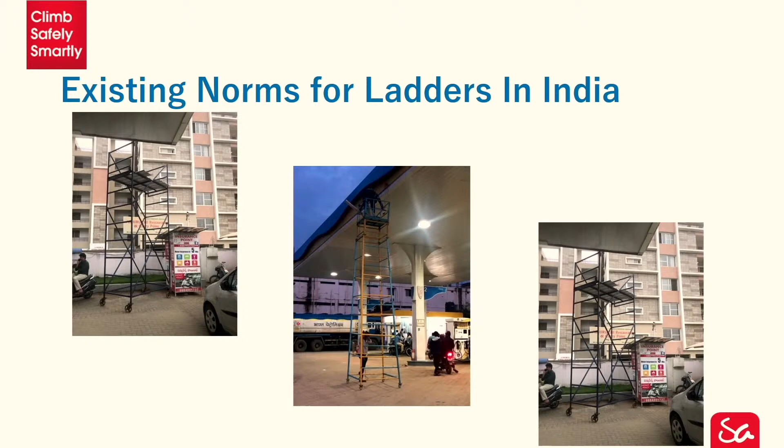Why do the standards suffer? Okay, this one, right? The standards suffer because we don't have a reporting system. We don't have a system that tells us how many people have had accidents just because of not following safety standards, be it home, be it outside. So these are the currently existing norms that people use. They are not safe, they are not standard, they are not good quality products. They are substandard products existing in the market.

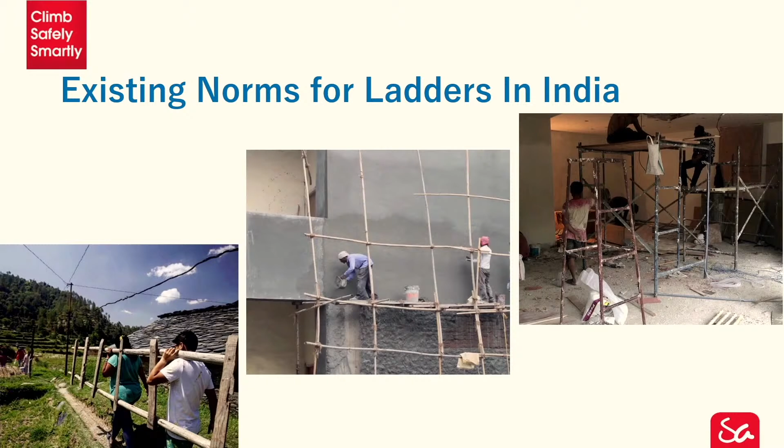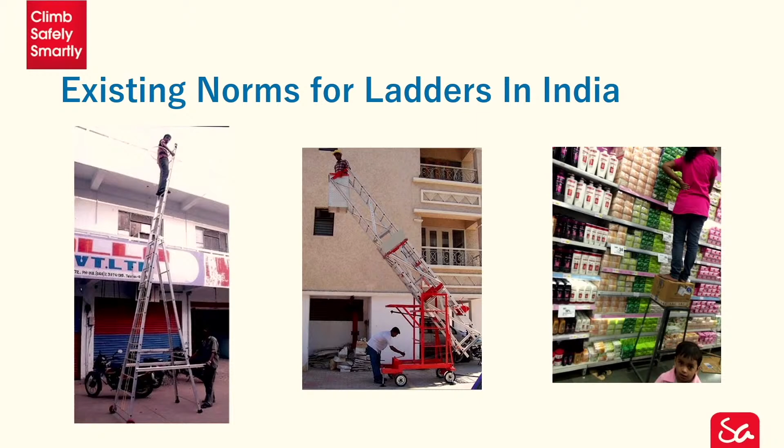It's for us to realize what is important, what is safe, and we actually let this happen. Even today, it's 2022, and we are still using bamboo ladders. With unsafe products, safety is totally compromised everywhere. Now the concern is, what are the safety measures that we can take? What is it that is plaguing our society?

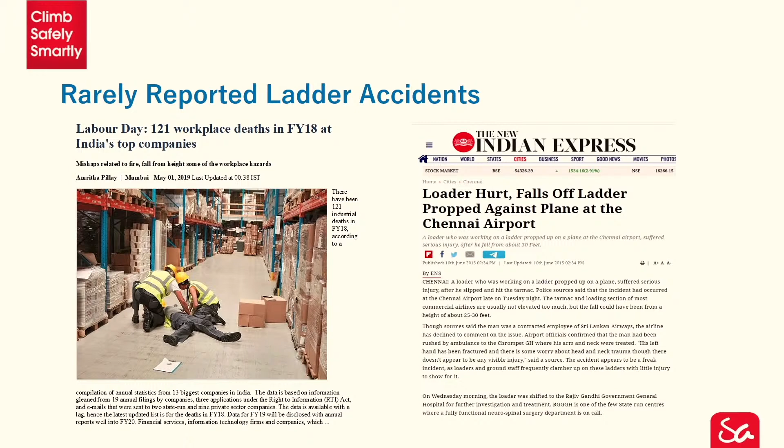We have numerous accidents happening at workplaces which go unreported. Many of them don't come into any reports, or even a police complaint is not filed. Many accidents at home are lost because they think it's not an accident. Some of these accidents are of course fatal. Some of them lead to permanent impairment. And unfortunately, even if these people go and fight for their rights, their life is gone in courts, not at home.

Now, this is very, very important as a country, as people, that we all take care of these issues and ensure safety for our people. They are our people, right?

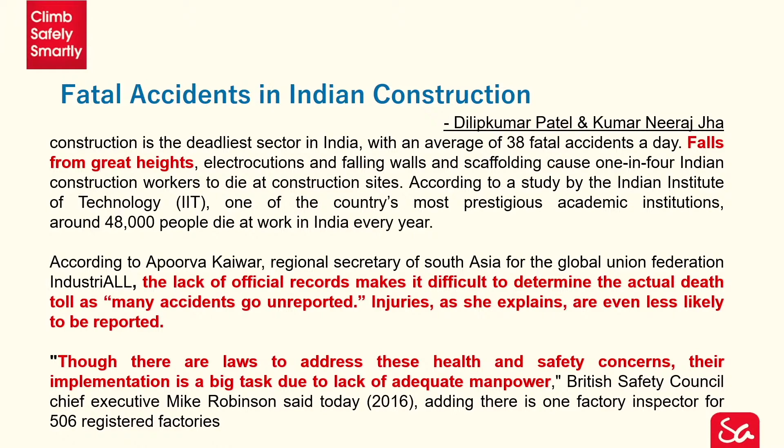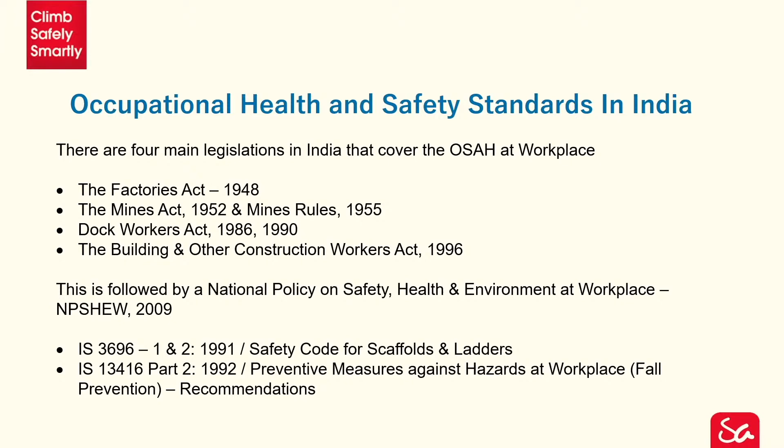Now, what we intend to do is, first of all, we know all these acts, which are very, very old. They need to be updated, for which we, Sagar Asia as a company, are working with Bharatiya Mazdoor Sangh and the Labor Ministry to come up with laws that can be implemented into industrial safety. Please don't hate me for that. So these laws need to be changed.

But the positive side is that the MNCs today take it as an important factor. They look into safety measures, and they actually want to buy standardized products. So now let me introduce you to Sagar Asia, a company that is about 40 years old with 150-year man experience because of the brands, the quality that we associate with.

This is what we bring, from the height of 2 feet, that is domestic ladders, to 400 feet industrial ladders. And when I talk about ladders, it's not just ladders. They are access equipments, right from scaffoldings, wind tower internals, to aviation docks.

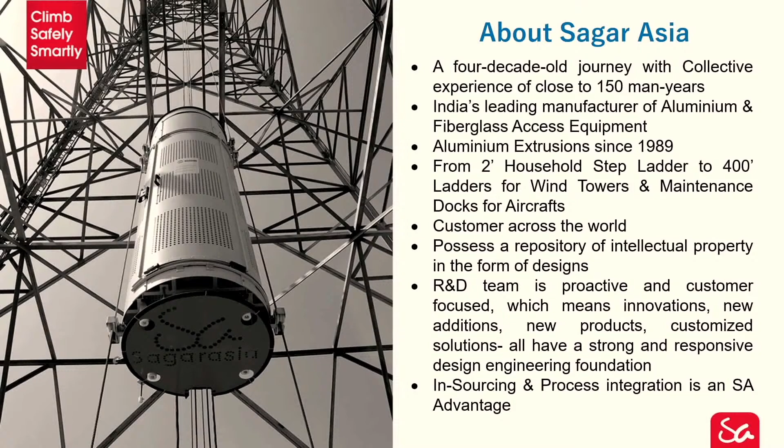Our research and development team works constantly towards providing the best safety products. We follow all the standards of safety, right from American, ANSI, EN, and Australian. So as a company, we have the capability in terms of technology to provide products that follow or conform to the safety norms around the world.

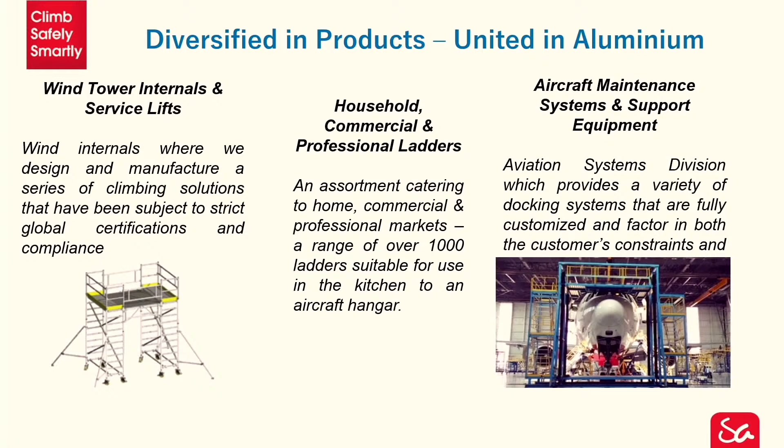So I'll take you very quickly through the range of products that we have, the wind tower internals and lifts. For that, we have household, commercial, and professional ladders, equipments for the aviation docks for MRO, extrusions, aluminum scaffolds to reach as much height as you want, we have manufacturing.

Moving on, the reason why I came here is to showcase a business opportunity which can be implemented for first generation entrepreneurs. Our MD, Mr. Vidyasagar, is a first generation entrepreneur, and he knows the problems that we face while setting up an MSME. And what he intends to do is support more young entrepreneurs into MSME businesses which can create employment in India, and of course be able to be part of a systemized culture that can help them run a sustainable business.

So we have our ladders, called Eurostar, a DIY ladder, for which we are giving the technology at such low cost that a person can start a business at just 24 lakhs. As a company, we make an investment of 76 lakhs in terms of technology and machinery. We handhold you to the business. We have the capacity to buy back the products. We help you promote the products, and we help you run a sustainable business. All the operations of the business remain in your hand. Our intention is to make you more and more independent.

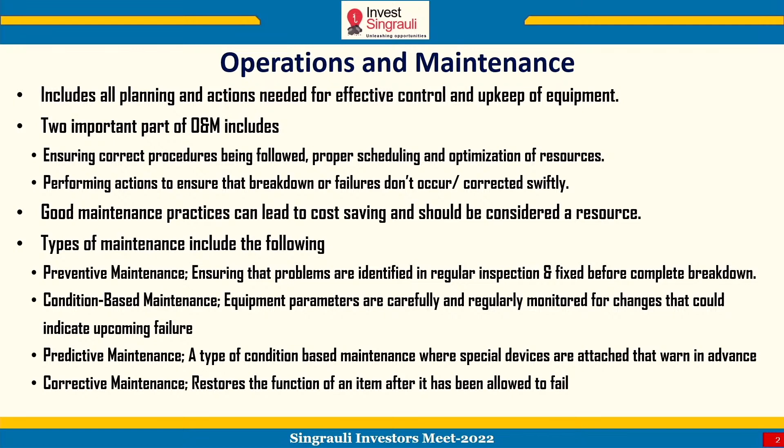So, talking specifically about repair and maintenance in mining and power sectors, because we are talking at a forum where people from the nearby region have come, and we are looking for opportunities in this area. So, this area is basically occupied by industries involved in the mining sector, mining के काफ़ी equipments हैं, plus power sectors के equipments हैं. So, in both these sectors, whether it is mining or power, the equipments are subjected to excessive continuous working, generally 24/7 without stoppage.

The loads that are applied on those machines are harsh: they are impact loads, sudden loads, excessive loads, thermal shocks, stress corrosion cracking. Many of these components, if they fail or require any predictive or corrective maintenance, have to be handled on site. At most they can be brought to a base workshop or a main workshop, but generally it is not possible to ship that equipment back to the original equipment manufacturer to get it repaired and brought back.

So, the harsh environment often leads to frequent breakdowns and failures. These breakdowns are very expensive; repair of these components is also expensive. At the same time, the failures disturb the regular working of that equipment, and these shutdowns are often very expensive. Therefore, there is an urgent need for repair that sometimes has to be performed on site or in the proximity of the site where the failures have occurred, to ensure that the equipment and components are available 24/7.

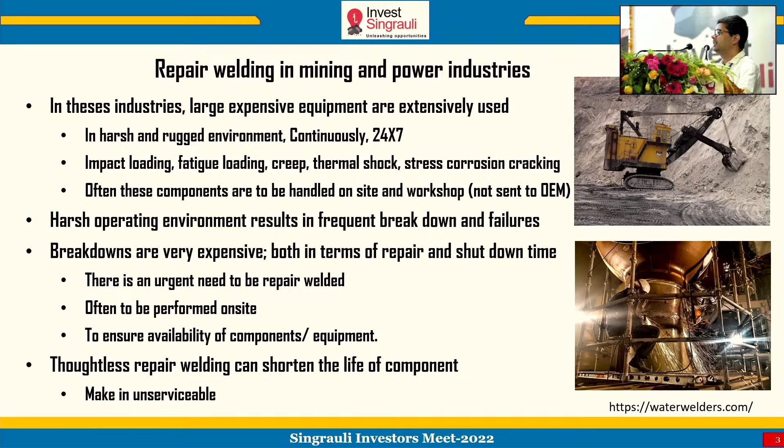It is important to note that any thoughtless repair, if attempted, will not only fail to rectify the problem, but can sometimes make a component that was repairable unserviceable. So, this is currently the issue, and this problem offers a lot of opportunities.

Next. Welding maintenance can be preventive or corrective. To prevent failures, for the equipment we have purchased, activities like cladding and hard facing can be done on those components so that their life can be increased. This is a tremendous opportunity, because components like mining equipment are continuously used in environments where they get worn out and corroded, and if they are cladded beforehand with a layer of harder, more wear resistant or more corrosion resistant material, the component life can be increased. These processes also come under the category of welding.

Some of them require expensive equipment, but many of those processes can be done using equipment which is pretty cheap and already used for welding applications. Similarly, repair welding is another technique which has to be used often, and it has to be done in a very thoughtful manner so that it can actually help the industries where it is used.

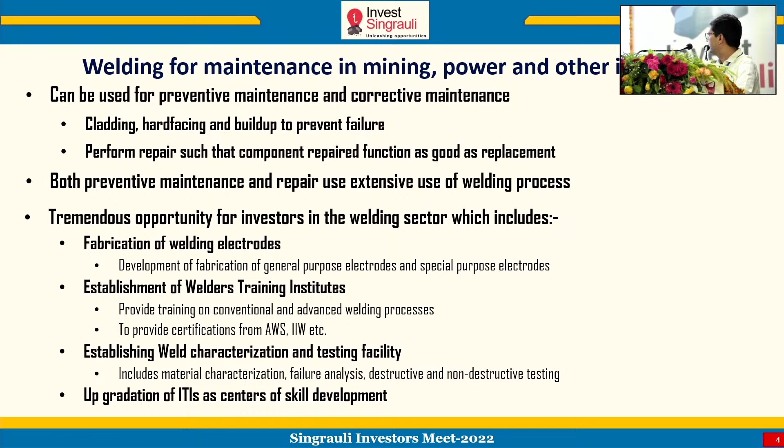Next. Welding electrodes: I have made an extensive survey and visited industries, and they are extensively used for many repair operations in both power and mining industries. These electrodes are consumed in very large quantity because most of the welding work relies on them, and it has been estimated that globally the contribution of welding electrodes as a consumable in welding is 40%. But in the nearby region and industries, this reliance on stick electrodes is still higher, around 60%. So, this offers a tremendous opportunity to establish industries which can manufacture electrodes.

The shielded metal arc welding electrode is a very simple consumable. It has just two parts, as you can see in this figure: a metal rod coated with a layer of flux. Any manufacturing industry just needs to initially procure the rod and coat it with a layer of flux. These two simple components and this simple activity can lead to the establishment of a welding electrode industry.

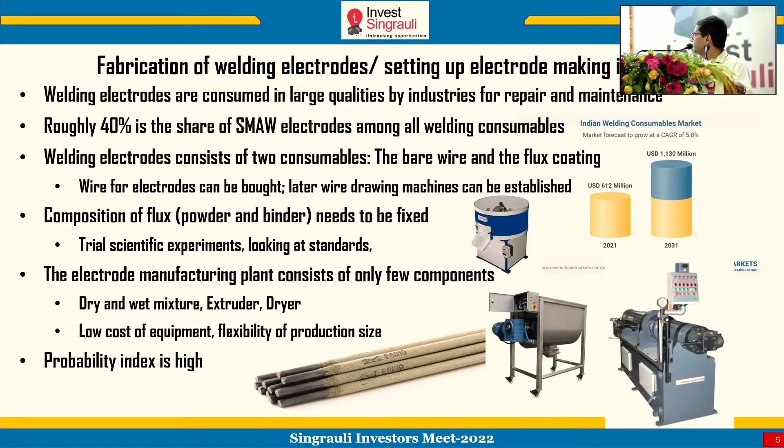Now, I have been associated with welding and I have visited many places across India. For welding jobs, we recruit welders. Often these welders are trained in those particular industries, let's say mining industry or power industries, to perform the job fairly well. But for critical applications, it is often mandated that the welders should be well trained, but more importantly, they should be qualified and tested by agencies which offer certifications to the welders.

A welder who has been certified by these agencies will have a lot of demand. Not only will it improve the quality of the welds that are produced, not only will it improve the quality of the repair, but the employability of the welder will also tremendously increase. So, if you go particularly to the western part of India and southern part of India, there are a lot of institutes which offer help to the welders, and in turn they can also make profits.

So, welding training and certification institutes, which are very small institutes, not as big as an engineering college, just a small institute where there are some minimum facilities. Let's say a training institute for the shielded metal arc welding process has to be established. So, a certain number of welding stations, a certified welding inspector has to be hired, and that institute can be started. The institute will provide training.

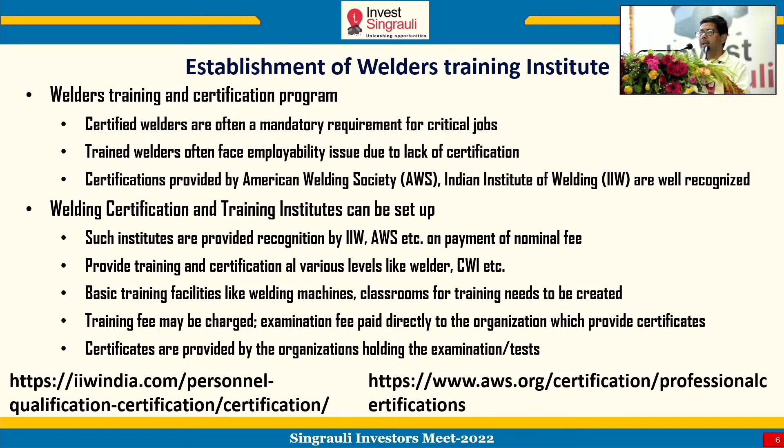The cost that has to be borne can be taken in the form of a fee from those welders, and successfully profitable institutes can be run on this mode. I have given the names, the websites of these organizations like Indian Institute of Welding and American Welding Society. They offer certificates which are well recognized, and they are very much sought after by welders. Next please.

Now when we look at these expensive equipments that are used in mining and power, there are bound to be some failures, and of course corrective actions in the form of repair welding have to be carried out. Now during the repair process, as well as to ascertain why the failures have occurred, a lot of scientific data needs to be collected in the form of testing.

There are private institutions, particularly in larger cities, which have to be approached and which offer these facilities. They have got trained professionals and the equipment needed to test the material, to perform corrosion testing, to investigate why a component has failed, and to offer some special testing.

Now after a component has been repaired, or there is a component that has been fabricated in-house, there are always chances that there may be defects present inside the material. On the top part, the machines will actually destroy the material and then tell you whether it was good or bad. Then there are other sets of techniques available which can, without destroying the component that has been made or repaired, tell you whether it is good or bad. These are known as non-destructive testing facilities.

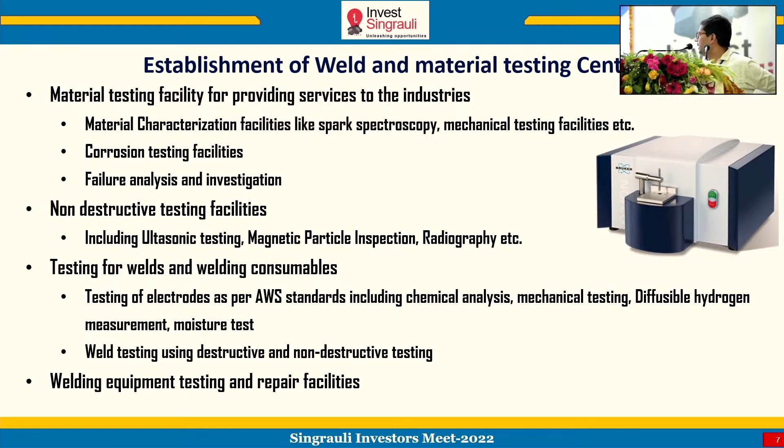Similarly, welding equipments, particularly arc welding equipments, are pretty simple components, and any breakdown in those components can be very easily handled, because the parts that generally get damaged in these welding equipments are inexpensive, and generally when the welding equipment fails, it does not mean that the entire equipment has failed, only some components have failed. So an institute can be established where testing, repair and rectification and standardization of the welding facilities and equipments can be carried out. Next please.

Now another very important area where I would like to talk and where people have to think, particularly the MSMEs who are already having their enterprise in this place, and similarly the other big organizations, is the upgradation of the ITIs and setting up of new ITIs which actually cater the needs of the nearby industries. The curriculum, the facilities that are generally present in ITIs need to be upgraded so that people who are coming out after graduating from those ITIs have the necessary skills that will be required for the industries which are going to hire them.

So this is another opportunity where, with a new curriculum, with a new course structure, ITIs can be established and other existing ITIs need to be upgraded. These facilities that can be augmented in the ITIs can also be used as a tinkering lab or a prototype lab where any new idea, any new development that is coming to the mind of existing manufacturing MSMEs, can be tried out in these upgraded ITIs.

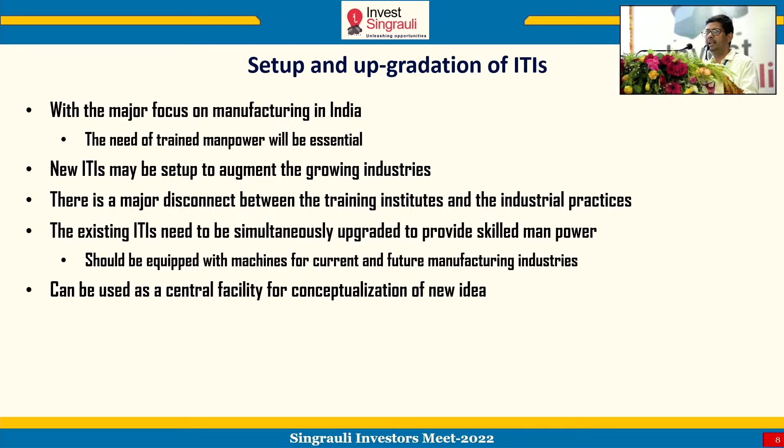So that's all from my side. I have a small 2-3 slides that I would like to quickly go through. Next please.

Okay, so as I have already told you, we belong to Indian Institute of Technology BHU Varanasi. Recently we have signed an MOU with the Central Government Ministry of MSME, New Delhi, wherein we are an implementation agency of a scheme of the central government known as Design Clinic. So we are an implementation agency and I'll tell you how we can help. This scheme basically is for those MSMEs that are involved in the manufacturing sector. This is not for any MSME, only those MSMEs that are involved in the manufacturing sector.

And these MSMEs, if they have got any design related problem or they would like to develop any new product, they can approach us, and together with IIT BHU we can put up a joint proposal that will be sent to the Ministry of MSME, New Delhi. Next please. So as I have mentioned, the idea is that any new product or improvement of the product, if it is needed by a manufacturing MSME and it requires investment, can be handled through this scheme.

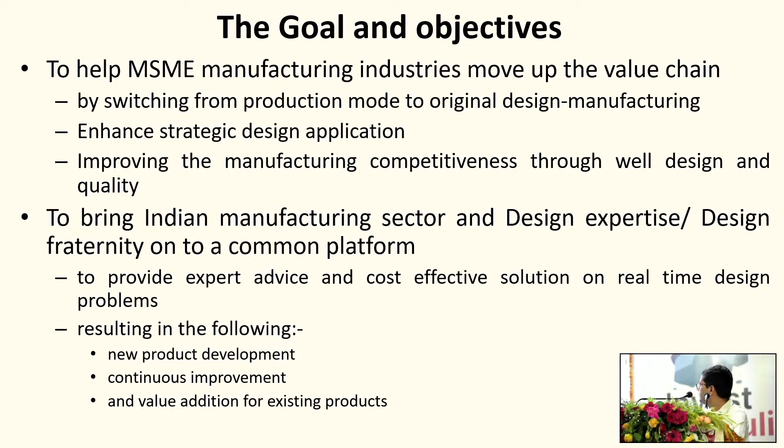So this scheme basically provides assistance to the manufacturing MSMEs in form of support from the Ministry of MSME to the extent of 15 lakhs. So 15 lakh rupees can be provided to the manufacturing MSMEs for any of these projects, provided the industry also shows their commitment by putting up 25% from their side. Together with IIT BHU, we can submit a proposal. Next please. Next. Next.

So Government of India share will be 75%, and the extent of help can go up to 40 lakhs. This will be in terms of expenditure that is borne in coming up with a new product or overcoming the existing problems faced by a manufacturing MSME.

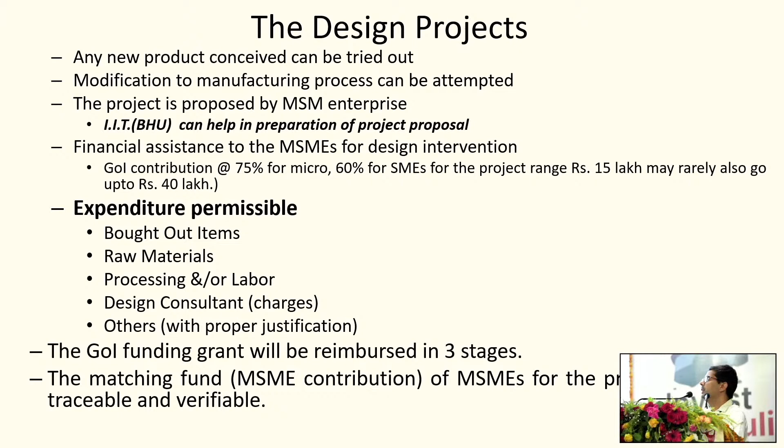The good thing is that the 25% share that the industry has to put can come also in form of labor, raw material, design consultation charge or any other charge that is justified. So many a times any bought out equipment that will be later used in the industry can also be put as a share from the MSME. It should not be necessarily hardcore money. It can be in form of equipment also.

The Government of India funding will come to the institute, and we will be providing you with the money that is required for whatever stages. In different stages we will be providing you the money, and ultimately when the product or the problem is solved, the respective manufacturing MSME will be benefited from this.

There is also a scheme that I would like to share over here. Sometimes the manufacturing MSMEs, next please. Next slide.

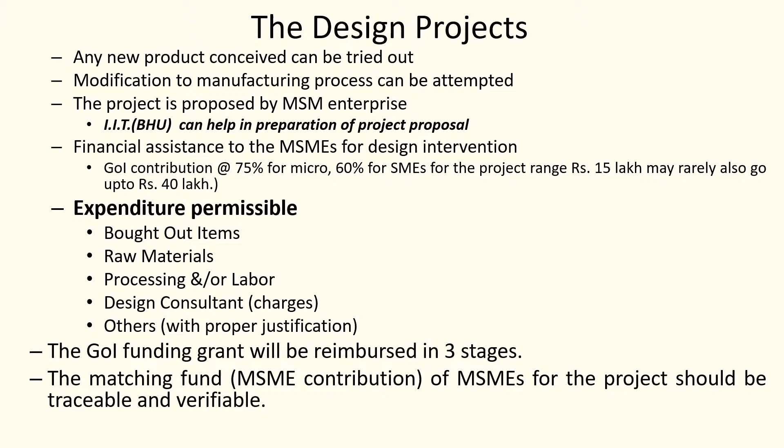Sometimes manufacturing MSMEs also face small problems on which our students may be interested in putting their effort. We have got very talented students at IIT BHU. They are the brightest students from the country, and they can also take up small projects which are known as student design project, which will again be funded by the Ministry of MSME New Delhi, and we will be the implementation agency. So these are another two schemes that I wanted to talk to you about.

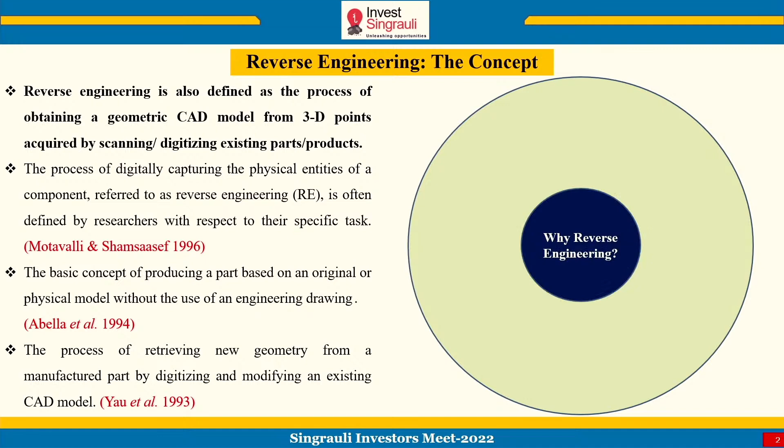So basically, why do we require reverse engineering? For competitive benchmarking, for a product in the market, we can provide a low-cost product in the competitive world. For smart manufacturing, which is a need of the hour, IoT-based, artificial intelligence-based manufacturing, we can use reverse engineering to achieve this smart manufacturing. Then, as all of us know, reverse engineering is for obsolete part development, design development. If the part does not exist, we can develop the design of that part if it is in front of us.

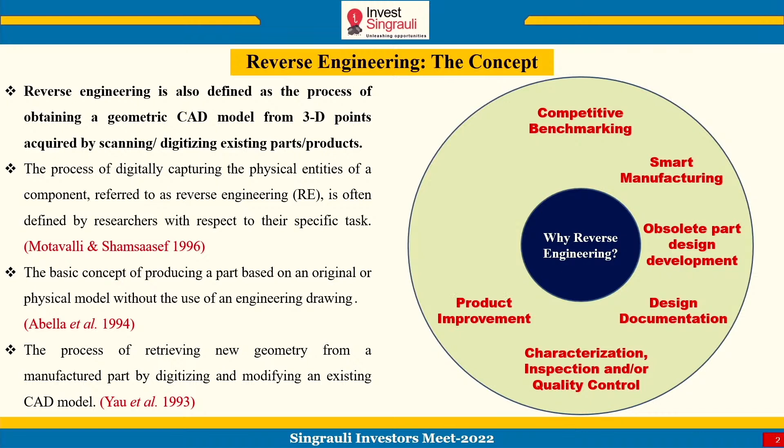Then documentation of design. This is very important, and I will come to it later on when I'll discuss the prospects of reverse engineering, design documentation. Then it can also be used for characterization of the samples. It can also be used for inspection as well as quality control. In fact, in automotive industries, people are using it largely for these activities. For product improvement, in the existing design, we can make improvement using reverse engineering. For animation and virtual reality, we can use the reverse engineering designs to create the simulated environment for our engineering purposes.

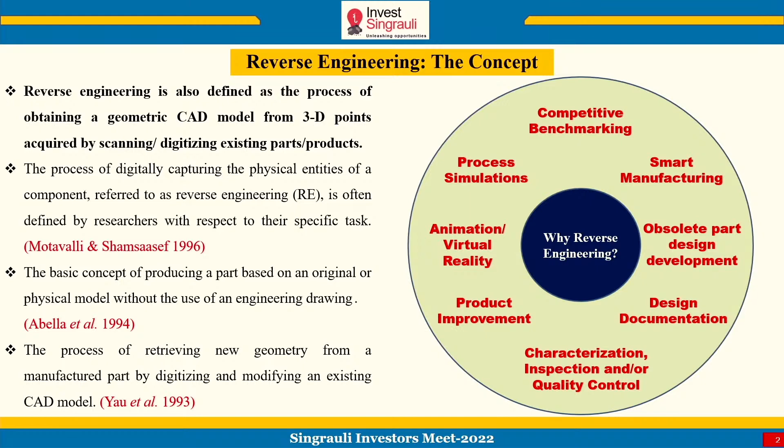For example, in coal fields, we can develop a simulated environment of a whole coal field using reverse engineering, and we can identify the bottlenecks that we might face in the real situation. Then process simulation, like in biomedical industries, for a surgery, which is a very complicated task. We can use reverse engineering to simulate the complete surgery before we perform it on a real patient. So this is where reverse engineering can help us.

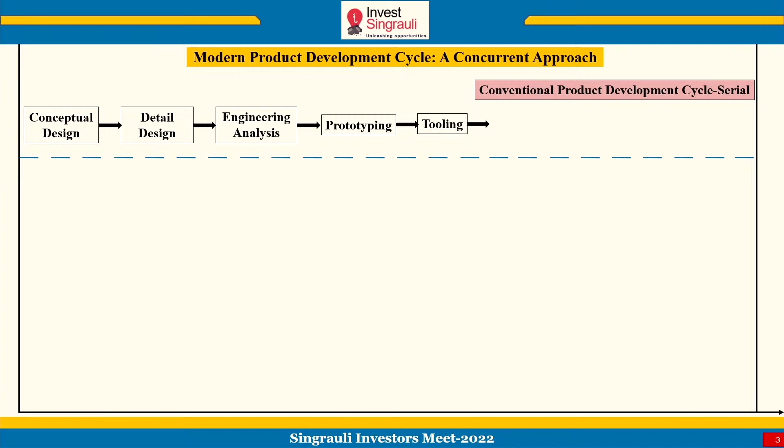So now what is the current scenario? The current scenario is the conventional product development cycle that we follow. It initiates with conceptual design. It is a serial type of thing: design, then prototyping, then manufacturing, and if some failure occurs, we again go to conceptual designing. This no longer exists now. People are moving way ahead. That is rapid product development.

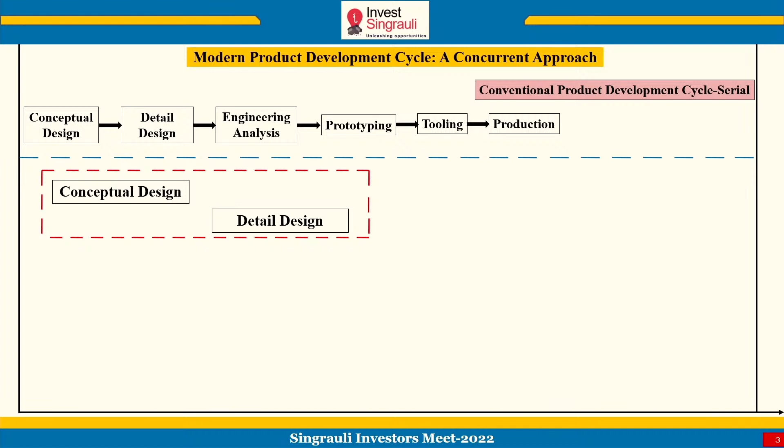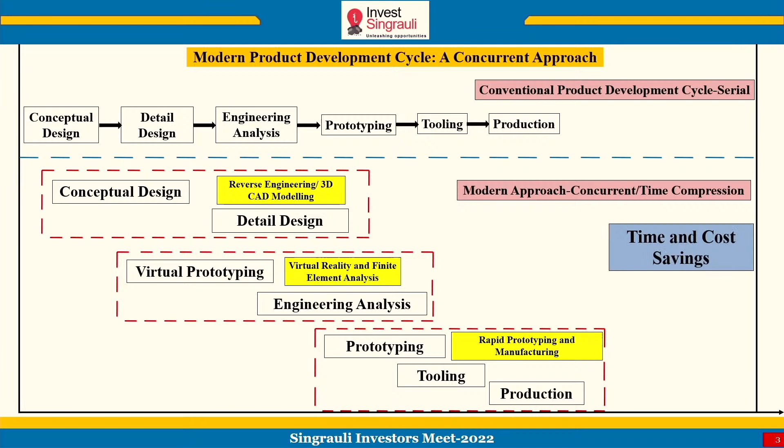That means all the things that exist in the serial production cycle have to be done simultaneously or in parallel, and this is known as rapid product development. We can do designing and simultaneously think of manufacturing, like using additive manufacturing technologies or 3D printers. So we can see what the problems are and identify them. It results in time and cost saving. Basically, this is the path of the product development cycle using reverse engineering.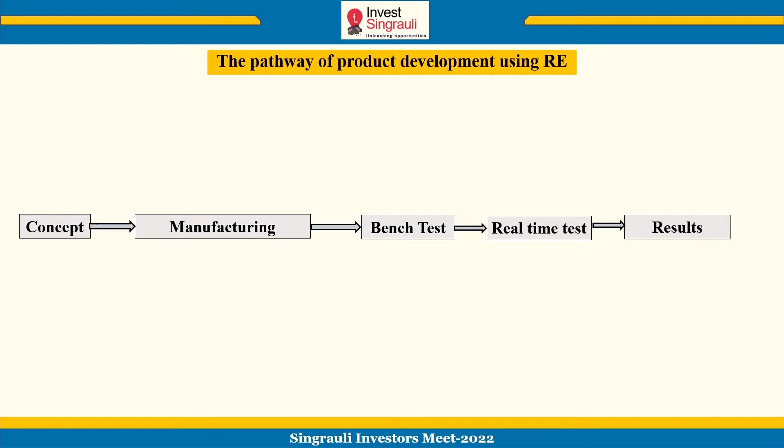As I've told you, this is the conventional way we are doing it till date. Concept, then manufacturing, then testing of the part, then real world testing of the part, then we find out the results, and if the results are not as per our standards, we again go to the design phase. It's a very time consuming task, and a lot of money is invested in this. To overcome this problem, reverse engineering can play a significant role.

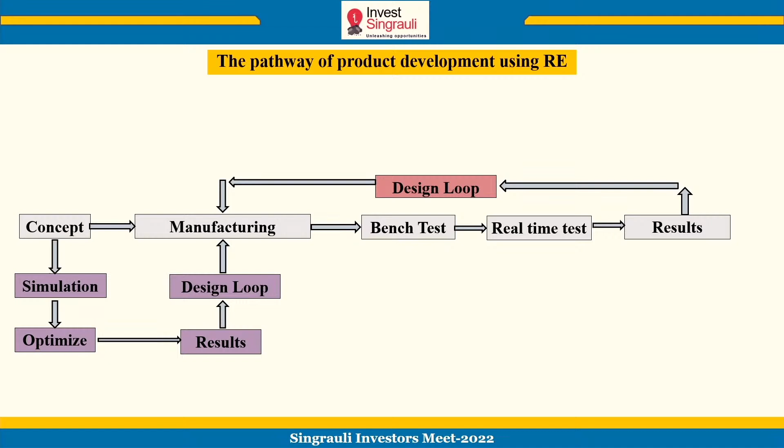How? From the concept itself, we can go for simulation of the process. Instead of manufacturing, we can simulate the process. We can optimize the design, then identify and analyze the results, and then go for the design loop again before manufacturing. So we are no longer spending any amount on manufacturing, and manufacturing cost is very high. Then we go for manufacturing. So the chances of failure of a product are very much minimized in this case.

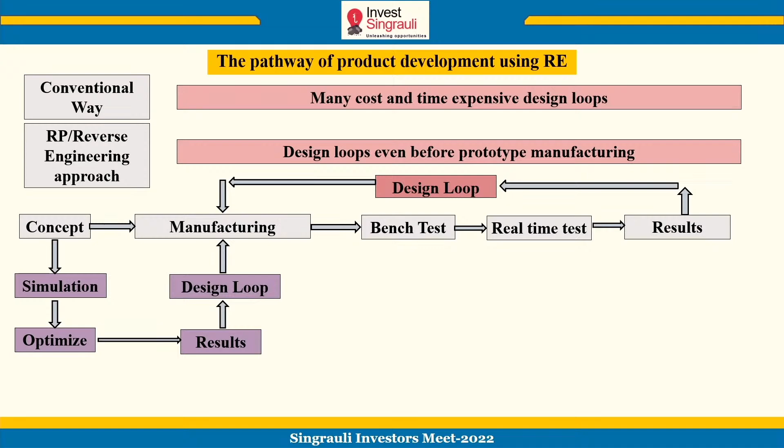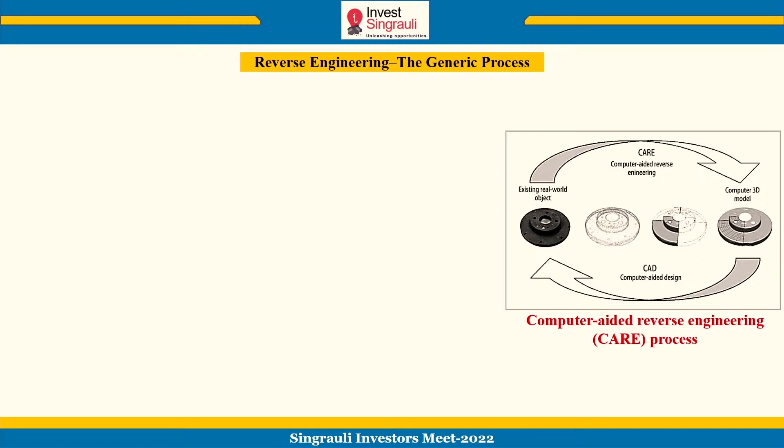In the conventional way, there are many costly and time-expensive design loops. In rapid prototyping or reverse engineering, the design loops exist even before manufacturing happens. So it results in cost saving as well as time saving. So what actually is reverse engineering? I'll showcase this with the help of this slide. What is the generic process of reverse engineering?

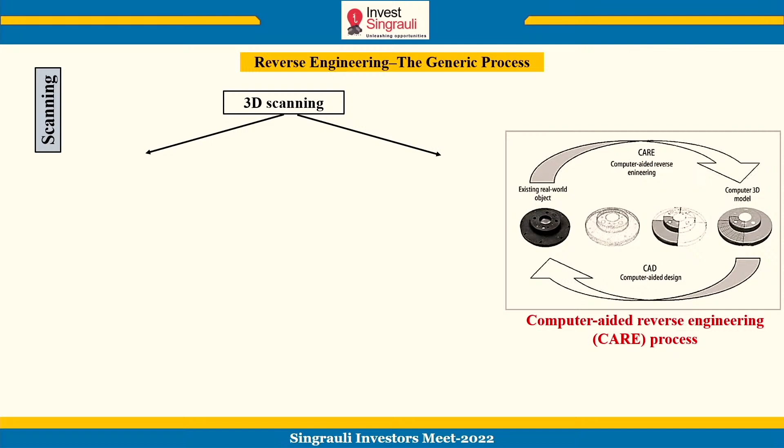It initiates with scanning of a product. If the product is in front of me, I will scan it. I could scan my whole body; it is possible. There are startups in India who do reverse engineering for artifacts also. So I can scan my body and develop the point cloud data using 3D scanning or whatever methodology I use. Then I can process that point cloud data.

The data can be in point cloud form or in the form of scans. We have all seen X-ray images in our life. An X-ray image is nothing but a single scan. In reverse engineering, we have multiple such X-rays, and we can stitch them together to develop a 3D model. The model is developed using a triangulation method. There are a number of algorithms, so a computer science engineer is required here.

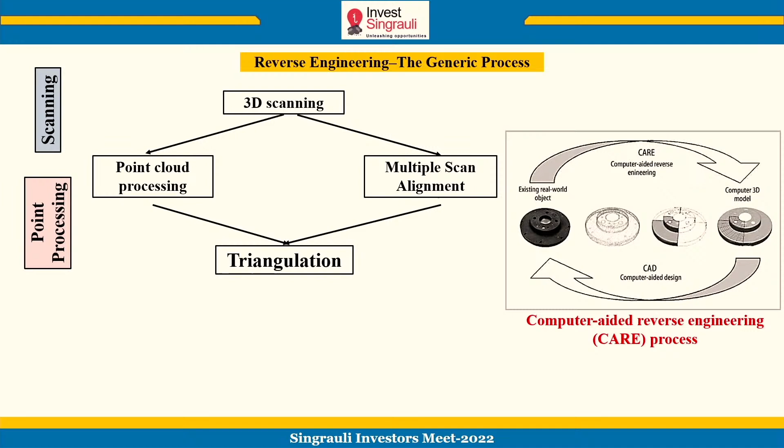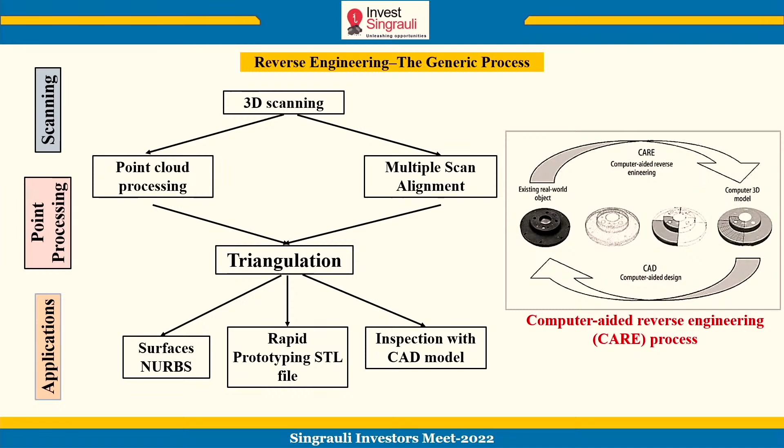We use triangulation to develop our STL model, to develop CAD-based surfaces like B-spline curves or non-uniform rational B-spline curves, or we can go for direct 3D printing, and we can use these for inspection also. So this is the basic generic flow cycle of a reverse engineering process.

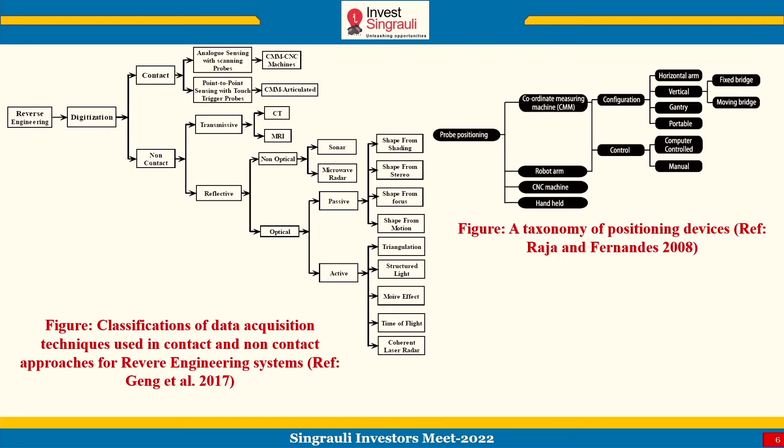These are some of the technologies. The most popular one is laser-based 3D scanning, and CMM machines. Then we have computed tomography machines, CT scan machines, MRI machines. These are some popular machines in the reverse engineering field. If somebody wishes to get the details of these, they can always contact me.

Okay. So now let us understand the prospect of this technology. This was about the basics of what reverse engineering is, what it can do for us, and what people are doing all over the world.

Let us see that and understand the importance of this technology using some case studies. So this is the first case study, which showcased the prospects of reverse engineering in automated component repair. And this happens in almost all engineering fields. There is a component failure which occurs. Okay. So here you can see there's a component failure, there is damage. We go for reverse engineering of this component.

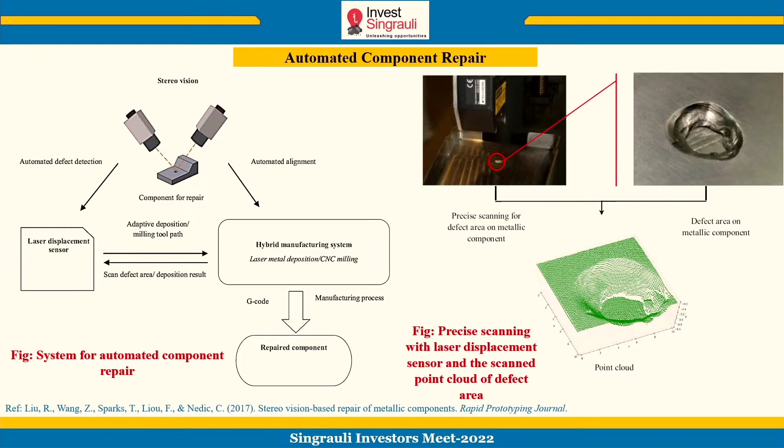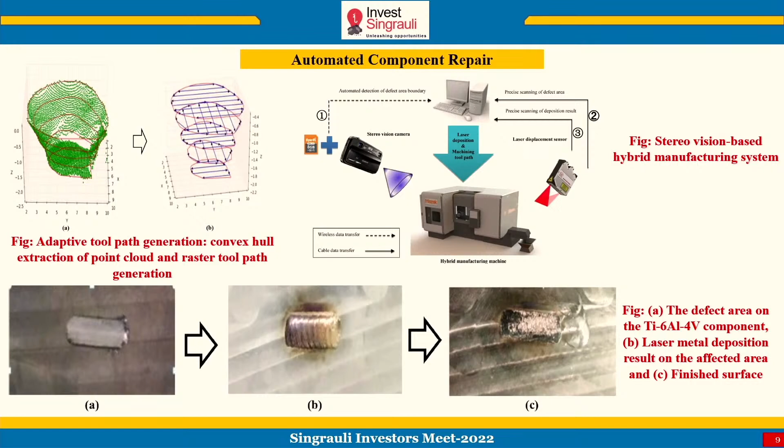We have developed the point cloud data, which is shown at the bottom right, and then we can use additive manufacturing techniques. So this technology is a hybrid reverse engineering and additive manufacturing machine which was developed, and then we can directly print the metal part on the same component which failed. What we do currently, we replace that component. No, we cannot replace it. It's very costly. What we can do, we can repair it. In the same part, we can do the repair, and we can utilize that component for our engineering use.

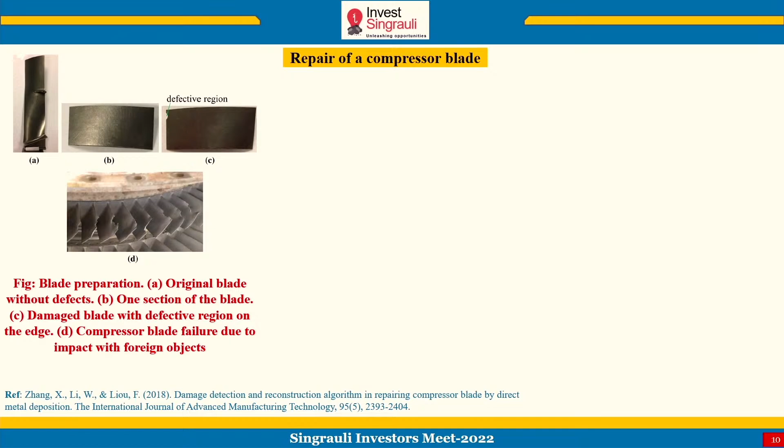Again, to see a repair, this is a case study of repair of a compressor blade. So here there is a compressor blade which encountered some damage or wear and tear. So you can see some wear and tear in the component, the compressor blade. So we do reverse engineering. We develop the point cloud data. We process that point cloud data. You can see the damage model is shown here. So some part is missing.

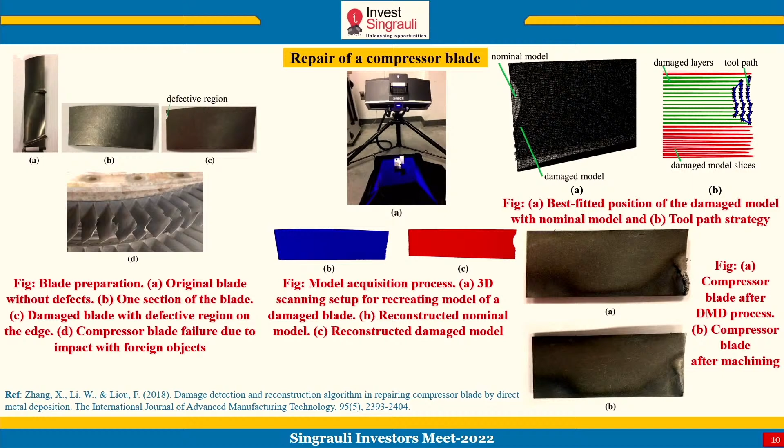Again, we replace this turbine, or we do welding and a lot of stuff. We spend a lot of time in this. Our machine remains still for a large number of days because of this. What we can do, go for reverse engineering. We can develop tool paths for this, and then we can go for direct 3D printing, metal-based 3D printing. Look, we have prepared the same component by 3D printing. A metal-based 3D printing technique, basically the direct metal deposition technique, has been used here, and we can finish it. We can use the same component for further use. So it will save time as well as cost.

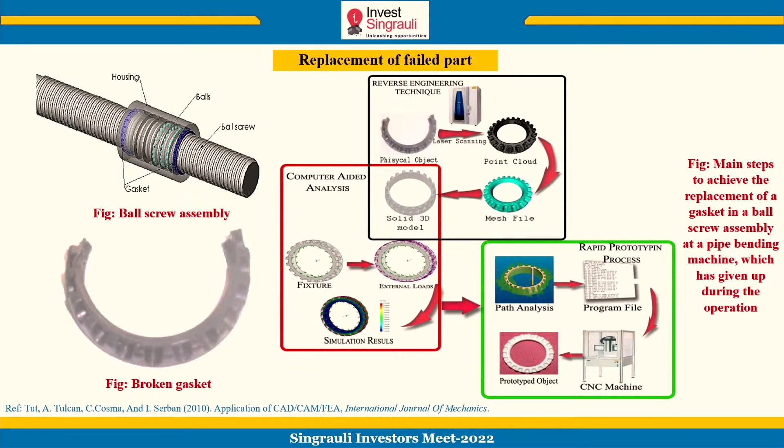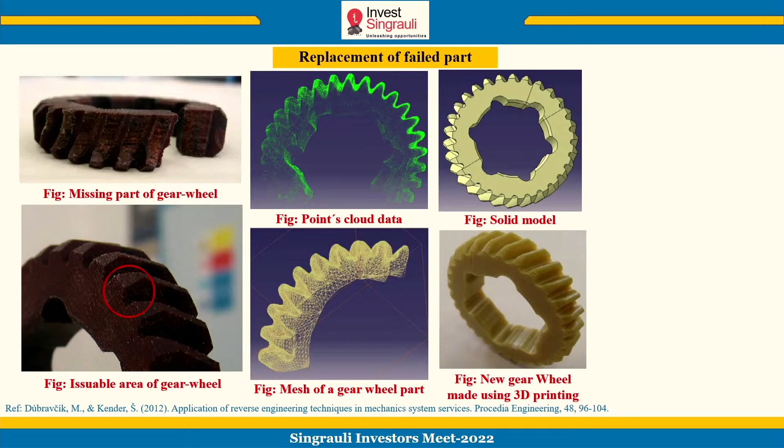Again, replacement of a failed part. This is a gear which failed during some engineering operation. This is the process of reverse engineering: point cloud generation, mesh generation, solid model development, then the 3D printed part, the gear that we have reverse engineered. Finally, we have used this 3D printed gear, which we obtained using the reverse engineering model, in an engineering application.

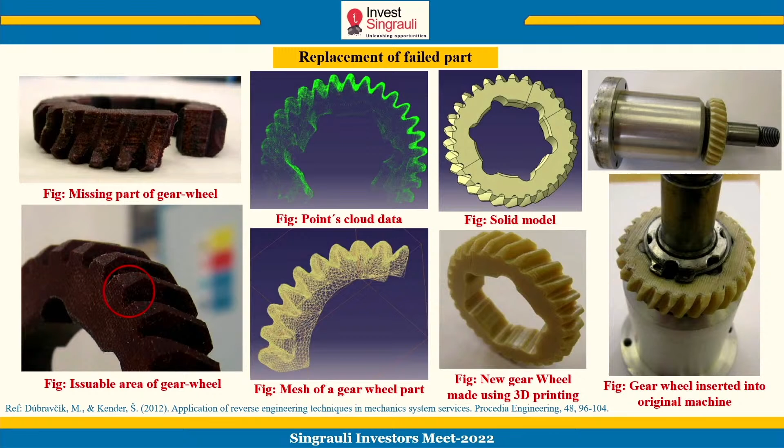People believe that reverse engineering helps them only with things like repair. No, it can do a lot more than this. It can develop a customized product for us also. How can it develop a customized product? This is a case study where a helmet has to be designed based on the structure of the human body. A customized helmet, which will fit exactly to the size of the human head. So in reverse engineering, you can see the steps involved, the point cloud and all those things.

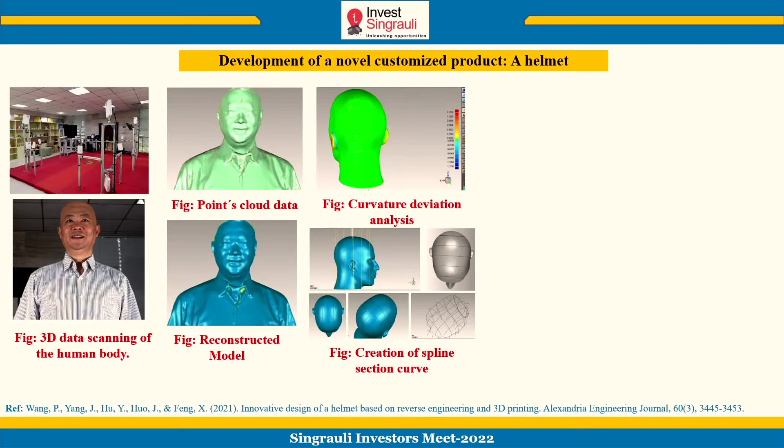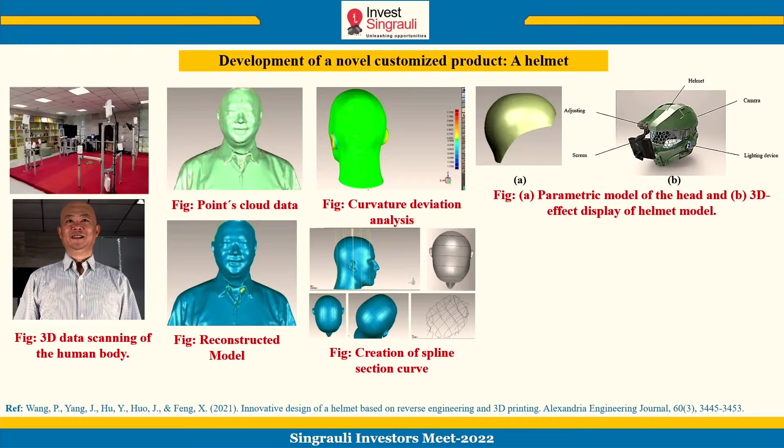So the curvature has been modeled using reverse engineering. And then on the curvature, we use CAD model development software to develop a design of a helmet. And this helmet has been fabricated. This is a highly customized helmet, and you can do improvements, you can add accessories to it, you can add cameras and all those things into it. So this is reverse engineering for customized part development or new product development.

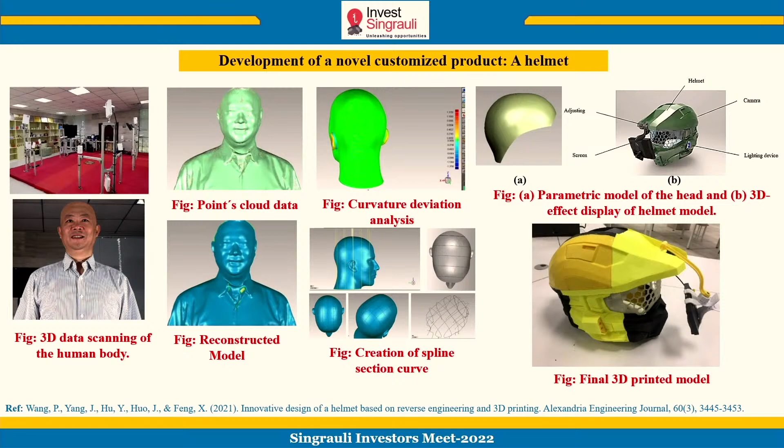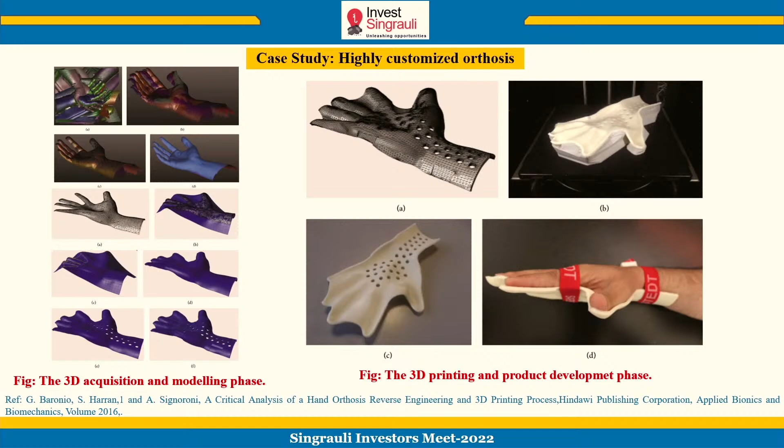So reverse engineering can play a significant role there. Okay? Again, this is a customized implant study. This is a study which has been carried out by me with the collaboration of AIIMS New Delhi. There is a patient who encountered an accident in the skull. Currently what we do, we fix the plate. The plate sizes are standard, and we put a whole high-weight plate on the top of a human skull. It creates a lot of infection and problems.

So what we can do instead, we can develop a customized design. Whatever the cavity is, jitna cavity ka bhag hai, bas usi ko hi aap model kare, and it will be a tight fit into that cavity. Okay? So this type of implant will not require any screws. One screw costs us 10, 15, 20,000, depending on the material that we use. If we are going to use titanium implants, it will cost us a lot.

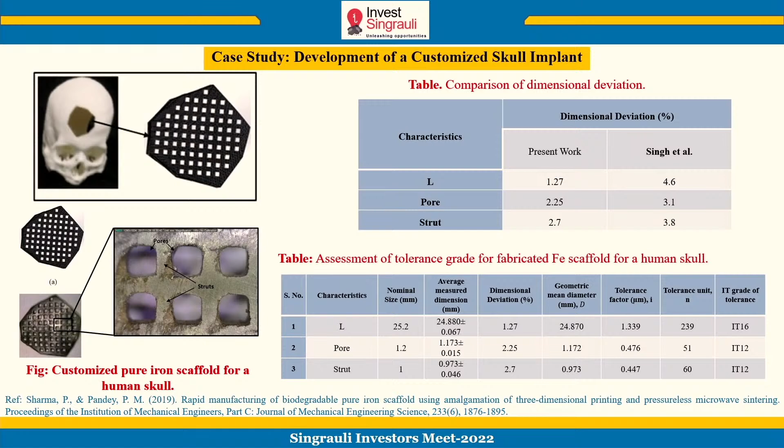So this is one of the solutions of reverse engineering for development of customized models. Okay? So you can imagine, this is a biomedical study, but you can always implement it for your own applications. Therefore, I have put in these case studies. And then it can also be used for morphological characterization, like components which are very difficult to characterize. For example, casting products. There are a lot of defects in casting products. So the automobile industry uses reverse engineering to identify the porosity, to identify the micro cracks, using reverse engineering.

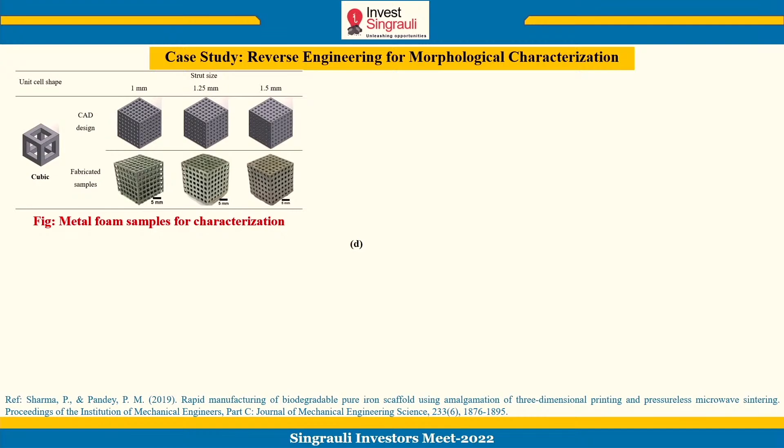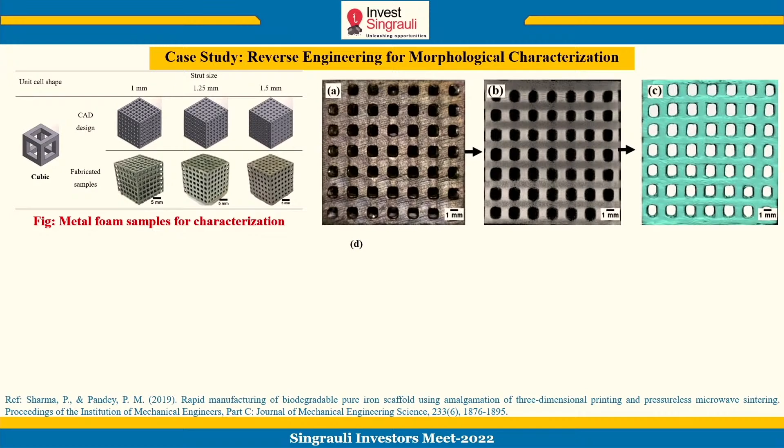So this is again a metal foam component which is considered to be a very complex shape, and if I ask you to get me the volume of this fabricated sample, it is very difficult to obtain the actual volume. We can always say this is the ideal volume, but the actual volume I cannot get from any characterization method. But using reverse engineering, using such methods, like this is the metal component, then the micro CT scan image, X-ray image, and then the model, and this is the reconstructed model.

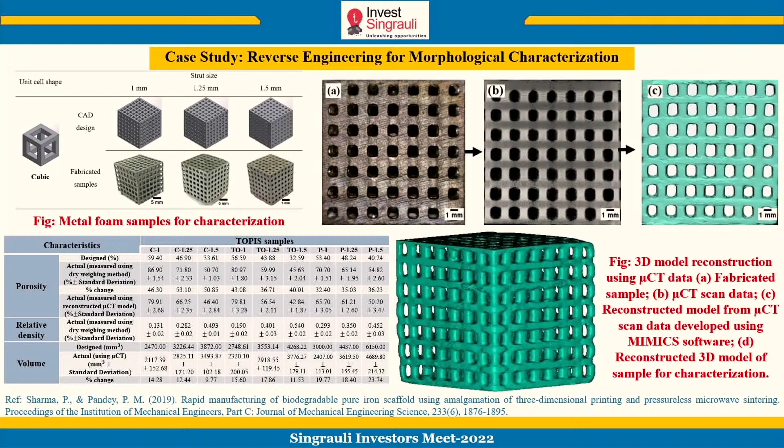So using this reconstructed model, we can get the porosity in the component, we can identify the volume of the component, the surface area of the component, the actual size. In fact, we can use this CAD model for finite element analysis directly. So it will give much more reliable results as compared to the ideal CAD models that we develop for FEM. Generally what we do is develop ideal CAD models. They will give results, but they will not be close to reality. But if we are using the reverse engineering CAD model, they can give us realistic results.

So what are the opportunities and what are the challenges in this field? Let me showcase some challenges in various engineering fields. First of the challenges, very high lead time for part replacement. Then requirements of large amounts of inventory and all those things. High downtime due to difficulties in procurement of these spare parts. Machines remain idle for 10, 15 days or months. Okay, and those machines are very expensive.

Then there is great difficulty in the improvement of existing designs or existing machinery. We are using old machines and their efficacy is very low. So how can we improve it? These are the challenges. And then there is a huge lack of skill set in the reverse engineering field currently in India. So what are the solutions? Development of digital inventory. This is one word which is very powerful, and I'm very much sure that this will change the scenario of the engineering field in the coming future.

Instead of maintaining the whole physical inventory, we can have a digital inventory of our parts. Instead of having 500 or 1000 crores of physical inventory, we are having only CAD models of our parts. And those CAD models, on demand, we can print or fabricate. So we are no longer handling large amounts of inventory. Okay, so this is the requirement of digital inventory.

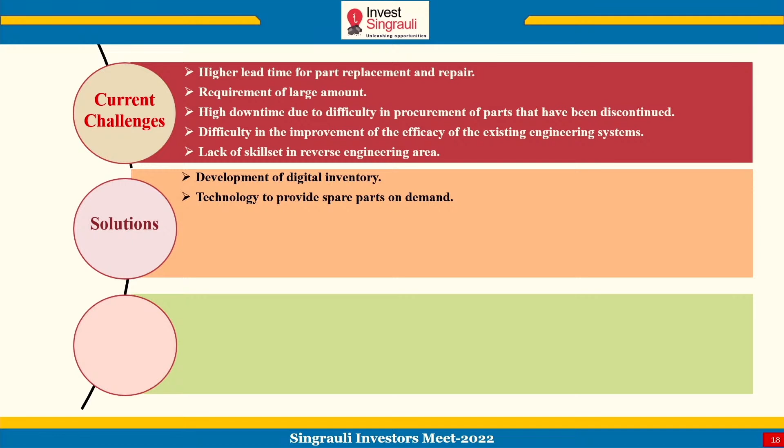Then technology to provide spare parts on demand, like 3D printing, additive manufacturing, or 5-axis CNC machines or 10-axis CNC machines, large scale machines. Then ability to achieve custom part modification. As I've showcased to you, custom part modification can be achieved. Then development of high-end systematic reverse engineering solutions with integration with additive manufacturing techniques. We can address those challenges easily if we have a systematic integrated product development process using reverse engineering and 3D printing.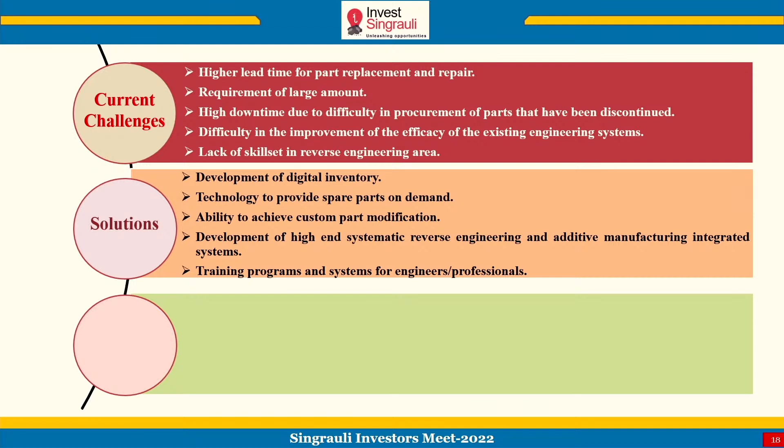And then we want training programs so that our engineers get trained in this field. So technologies which are commonly used to achieve these challenges are 3D scanning machines, CMM machines, CT scan, MRI machines, additive manufacturing systems, CNC machine systems, and software and algorithms. Okay, there is software like Mimics and PolyWorks, which works perfectly for these types of techniques.

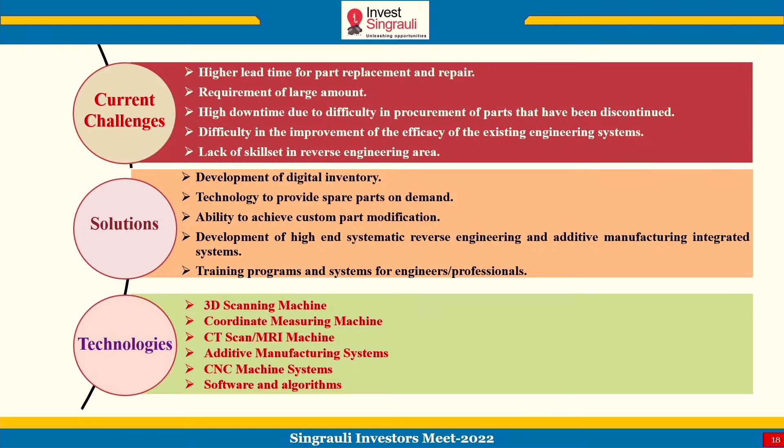Now let us think about what the business opportunities are in this area. The business opportunity is that we want a center for reverse engineering, at least in India, at a location such as Singrauli; it will help different industries a lot. What this center can do for us is give us a digital inventory. Not only can it give us digital inventory, but it can also provide support to the local vendors. So it will provide digital inventory.

Then training, as I've told you: local vendor training and their qualification. We train the small industries in the area of reverse engineering. We can provide the facilities for reverse engineering to the local vendors also. Advanced designing: we can develop complex shapes and improve existing designs. Then research and development, which is very important because reverse engineering is still in the development phase. R&D can be specific to an application, or it can be general.

Then rapid manufacturing of a product. Like I've told you, integration of reverse engineering with additive manufacturing or CNC technologies can result in rapid manufacturing of a product. So we can provide spare parts on demand. And then certification and testing. This is what we are lacking. We don't have enough certification or testing standards for reverse engineered products. So we need to establish a center which can provide such things.

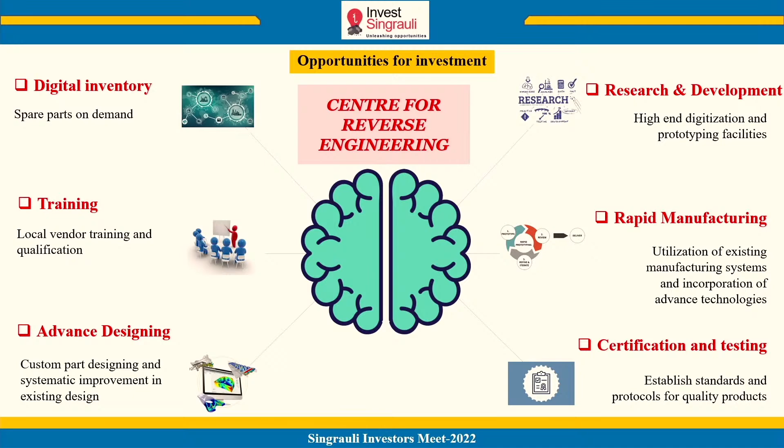Coming to IIT BHU, we have a metal 3D printer, a polymer 3D printer, and some 3D scanners with us. So we can provide some solutions in that regard, being a knowledge partner with NCL. You can always reach us for the development of such systems. We can also handle some projects so that you get an idea of how this technology can help you. Okay, thank you.